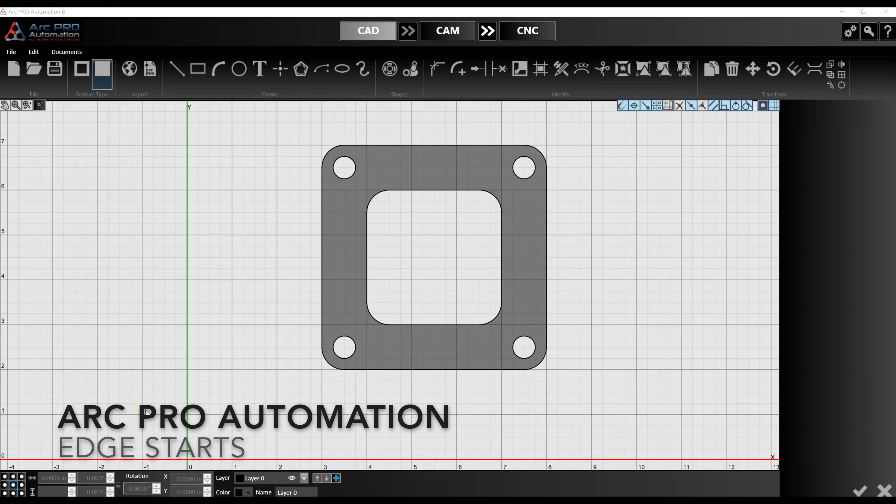Alrighty guys, today we're going to go over a quick video on how to do an edge start on thicker materials. So if you were working with, say, 3/4 inch on a smaller machine like a 65 amp Hypertherm, or if you were working with 1 inch or 7/8 inch on an 85 amp Hypertherm, then you're going to move into this range of what's called an edge start.

And in order to accomplish that utilizing the Arc Pro automation platform, you're going to have to do a few things in CAM, and if you have things like this part I'm showing on the screen right now where there's internal profiles, some of those cutters aren't able to do center piercing. So you'll see an option in the Hypertherm manual which designates whether or not it needs an edge start, whether or not it can do center piercing up to that thickness.

Generally on a 65 amp machine you get up to 1/2 inch thick material to cut and do center piercing, or 5/8 rather on the 65, and then on that 85 amp machine you're able to run up to 3/4 inch material for center piercing so long as you have torch height control.

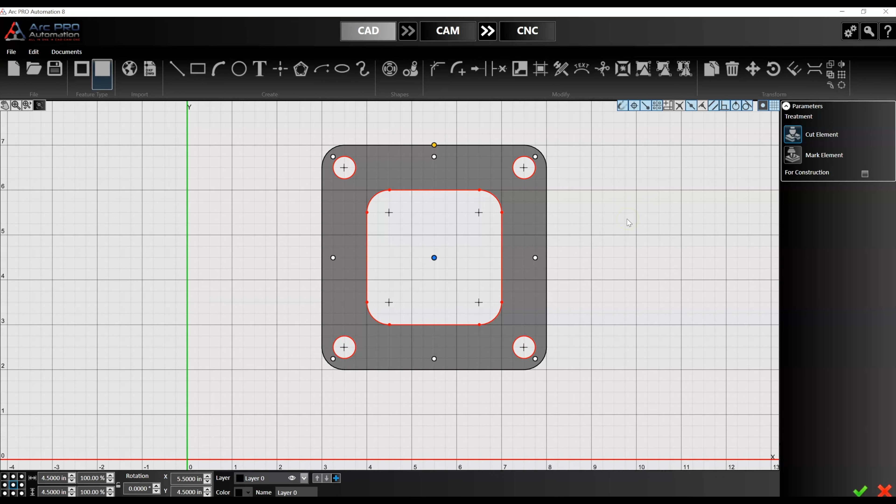So anyways, we're going to go over how to bring this through to CAM and then to CNC and see what that looks like. So we have a standard part here. We have an external cutout and we have some internals. Now if you are just performing external cutouts, which would mean that you don't have any of these internal holes here, so we could get rid of those, you wouldn't need to worry about doing any type of special setup for those internal cuts. But if you require an edge start for that material, you're going to have to do some extra preparation on that part. So we'll send this over to CAM.

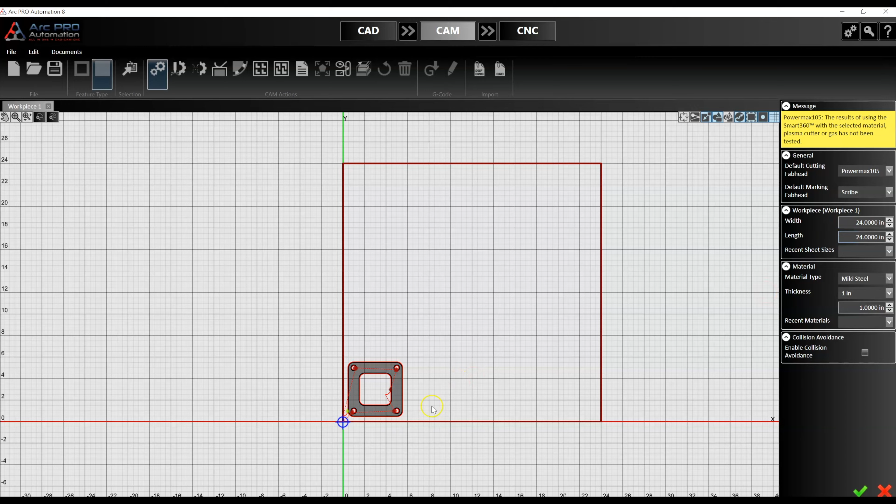Once we get into the CAM screen, as I zoom out here, you'll notice we have the part and we have our outer perimeter. So we can set the outer perimeter of the sheet by clicking this outer frame, and we designated 24 by 24 inches, and our part here is roughly about 5 inch by 5 inch, and we have it selected as mild steel 1 inch.

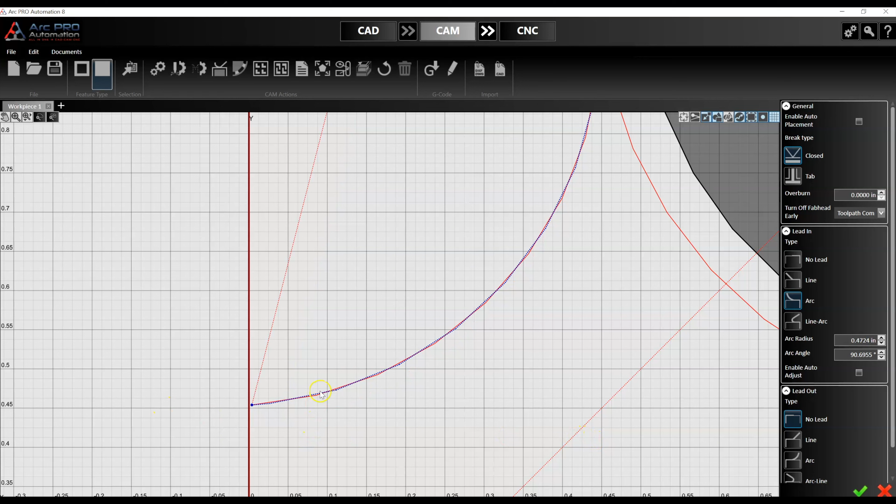In order to cut this part, what we would want to do is select the lead-in on the outer profile, and we'd want to drag this outer lead-in right to the edge of this outer profile and position it right on the edge. This would allow us to do an edge start, and if we had multiple pieces we would want to position each one of those lead-ins to that position so that it would be able to start and process that cut on the edge. For internal cuts now, once we get into these center pierces, in this case we would have to do a drilling operation.

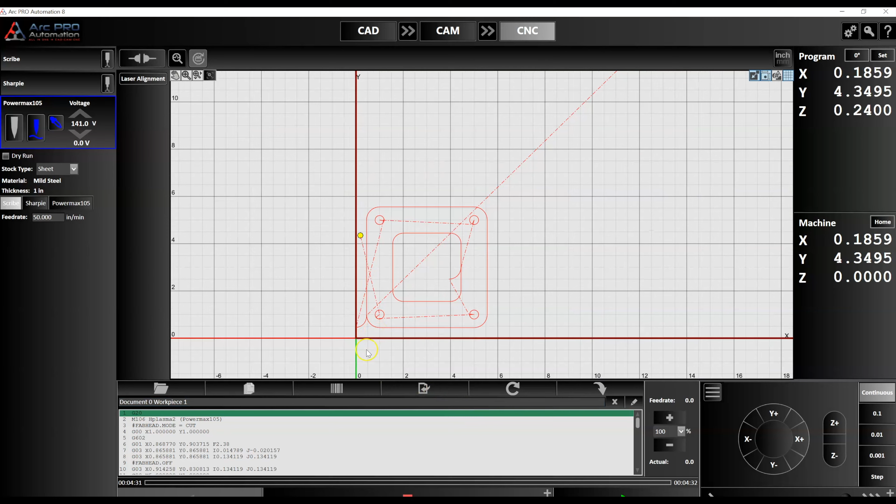So if we send this over to CNC, generally what we'd recommend is that you play the program. So if we click play, it starts cutting. You would stop it right when it starts out at the beginning of this cut, so right when it's about to do the touch off, right there. So right when it's about to do this touch off, I would recommend stopping it,

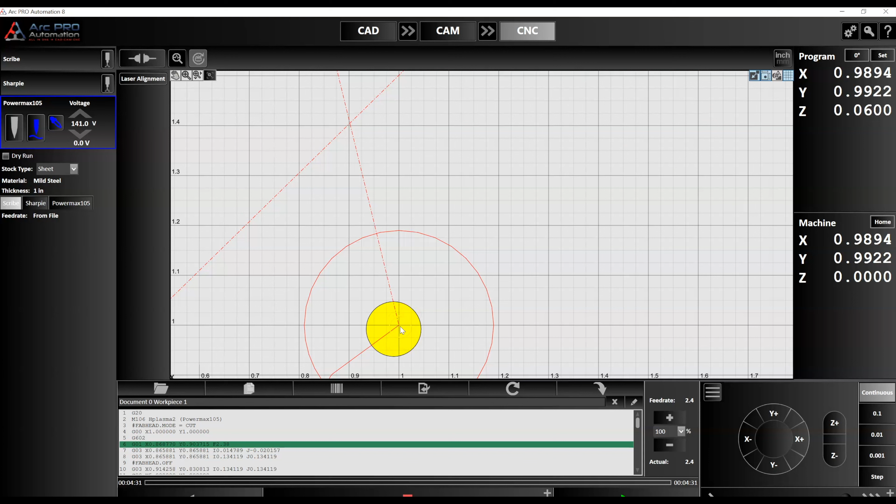taking a little Sharpie and marking right where the torch is, underneath the torch in the center, and then you can do a jump to line and allow it to run to the next part of the program, and then it'll execute the next motion right there, and then you'd make a mark here with a Sharpie, and you would do this for all these internal cuts. Then you'd be able to move the machine out of the way and you'd be able to physically center punch and drill these holes.

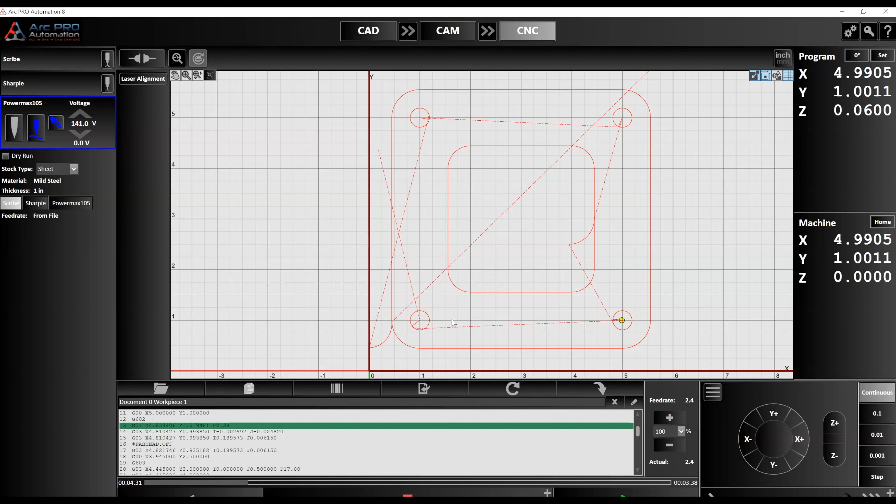Now what we normally recommend is if the machine has a capability to center pierce 1/2 inch material, and you're cutting say 3/4 inch plate, then you might want to drill down about 1/4 inch and then allow it so that the torch can penetrate through that 1/2 inch. And then what you would do is you go in the CAM screen and you would increase your pierce delay slightly to give it a little bit more dwell time.

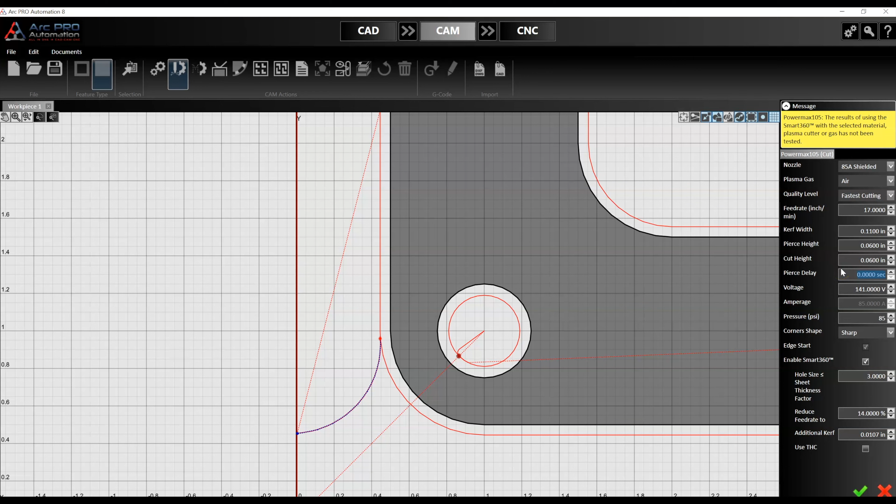So that's pretty much it in the Arc Pro automation platform. That's what you're going to be dealing with. It's going to be positioning the parts towards the edge of the plate and then making sure that those lead-ins start towards the outer profiles.

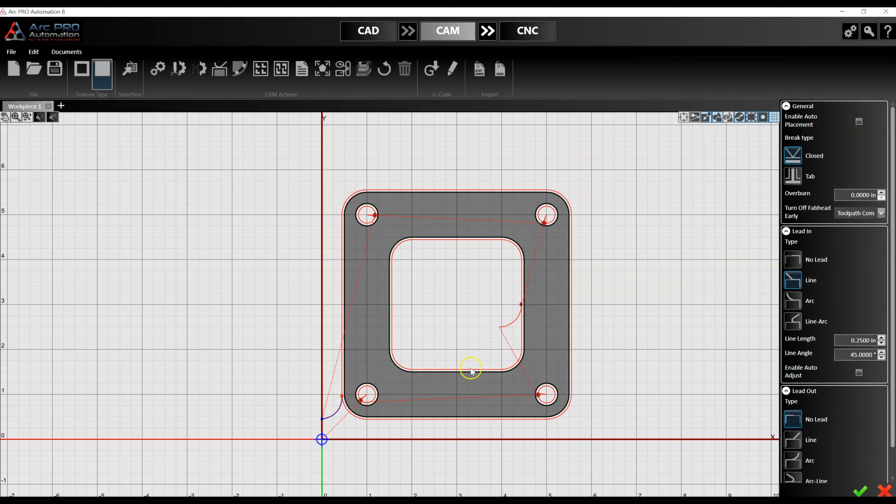Now if you wanted to make this a line lead-in instead of an arc lead-in, you can do that. We can check off that feature and it would make it look like this. You can drag this out to here so you're right on the edge. What you want to make sure is that you're not over the edge.

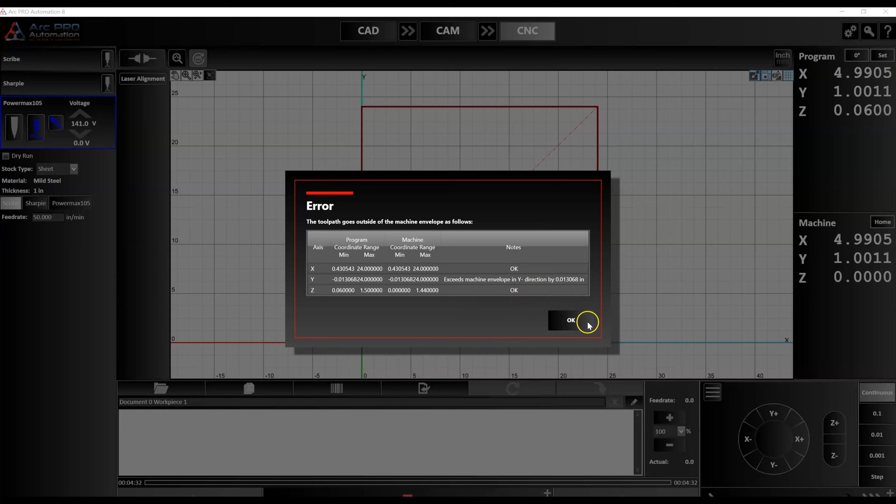If I'm over the edge and I go ahead and send it to CNC, you're going to see an error message that says you go outside of the machine envelope. If you see that message, it's because you have this lead-in dragged past this profile. So you want to be on that edge, but just on the inside of it. And then notice if I do that and I send it over, it has no issues. So it'll be able to execute that edge start and cut the profile.